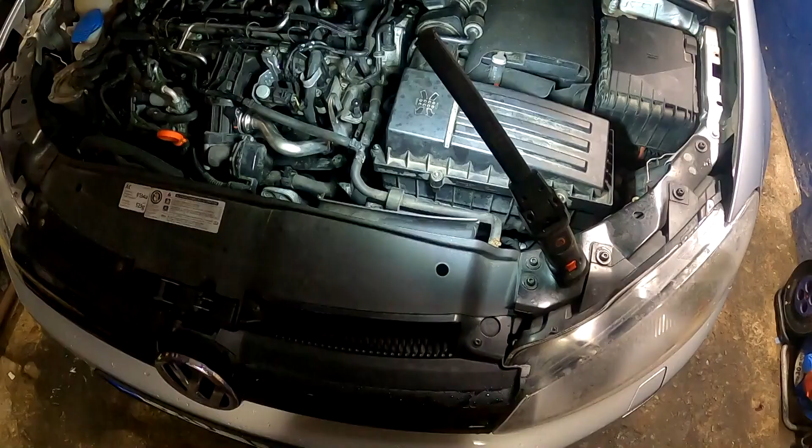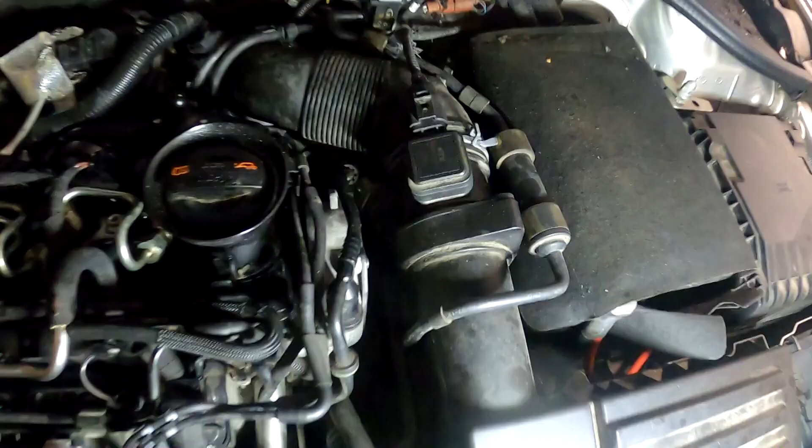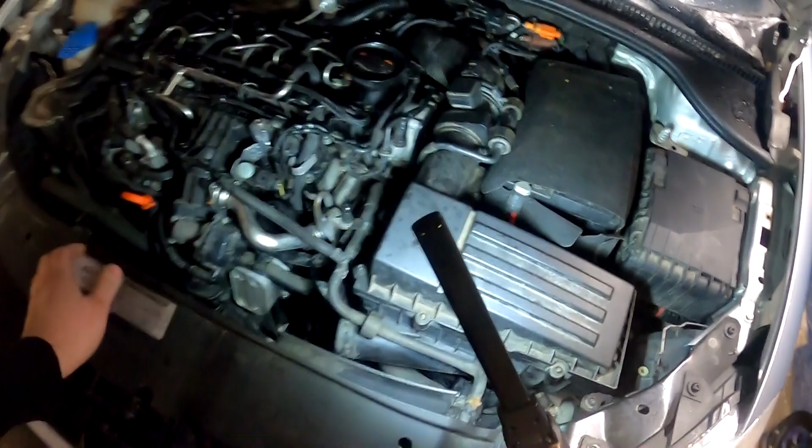So today, Volkswagen Golf 1.6 TDI mass airflow sensor problem. It has trouble codes, engine light illuminated, glow plug light flashing and so on. As you did see, there are two trouble codes present. One is for the sensor itself and the second one is for intake leak.

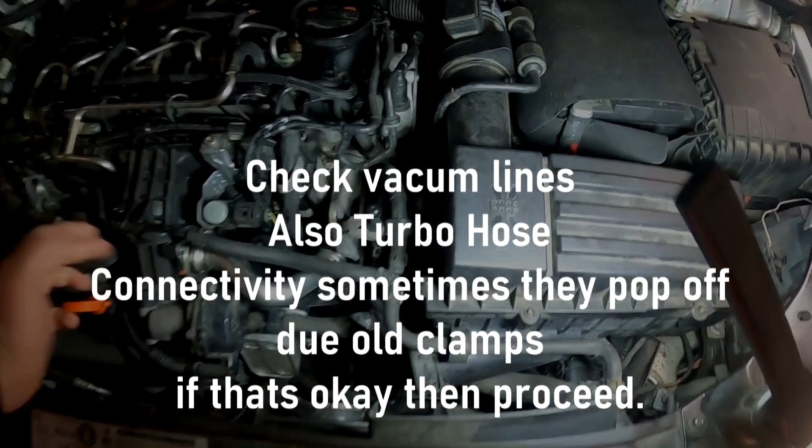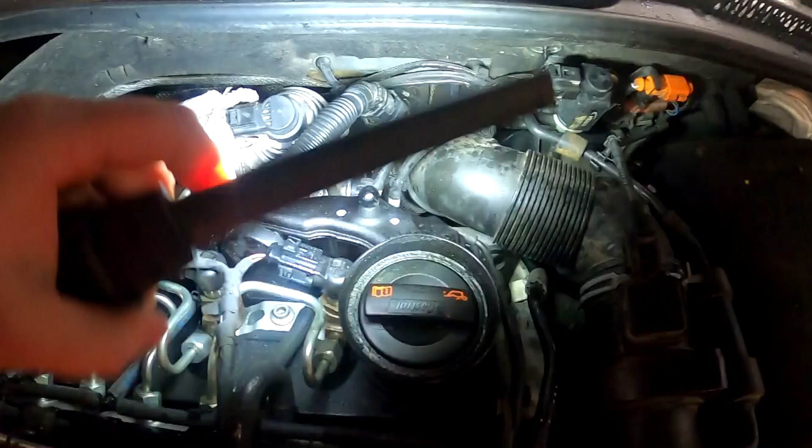In case you have an intake leak, then obviously check all those vacuum lines. As well, make sure that the turbocharger hose is connected and not cracked. In some cases it can be popped off and then it's making problems. For this particular car there is no problem with the hose, the vacuum line, everything. I did re-check, they are okay.

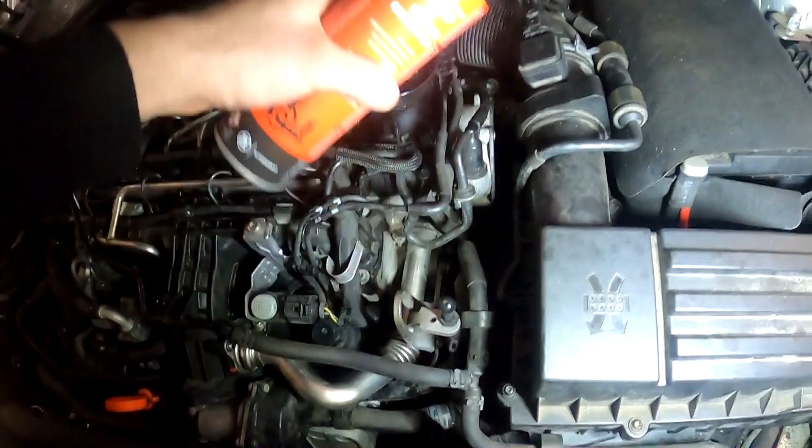Other thing you can do, take the brake cleaner, check intake leaks, spray it on the hoses, and then if the engine RPM starts rising, then you have air sucking in somewhere. I did this, nothing. Now let's go to the car and show you what the scan tool can show us.

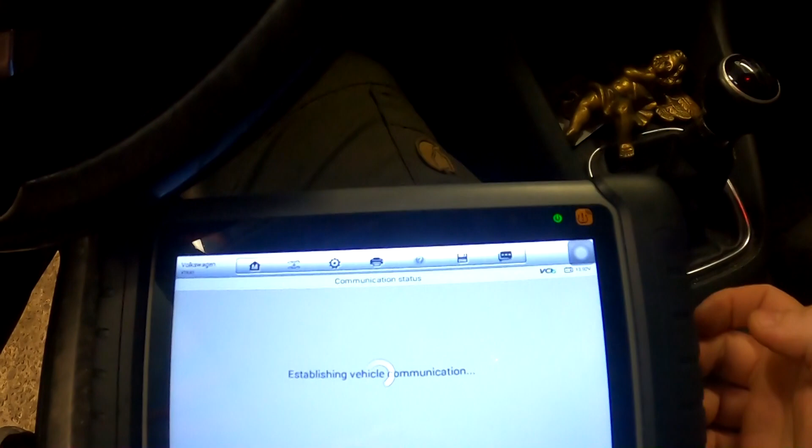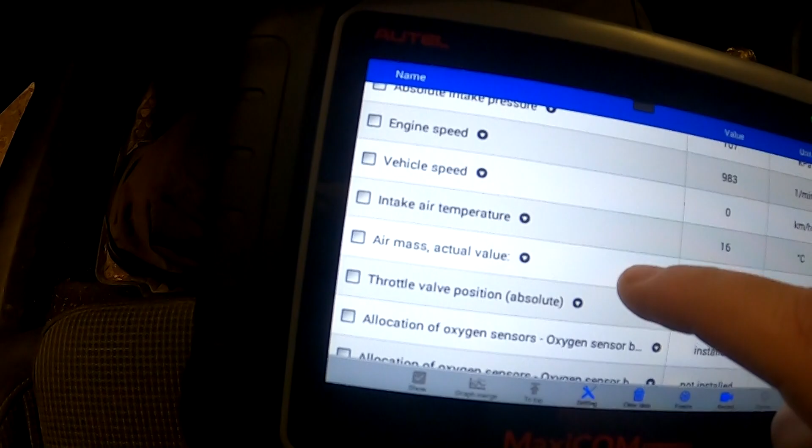Now, while inside the car, as you can see, the glow plug light is flashing, engine light illuminated. Car has no power when we're trying to accelerate. So let's take the engine control module and see what this smart machine can show us. So I have engine control management opened. Take the live data and let's see MAF actual value.

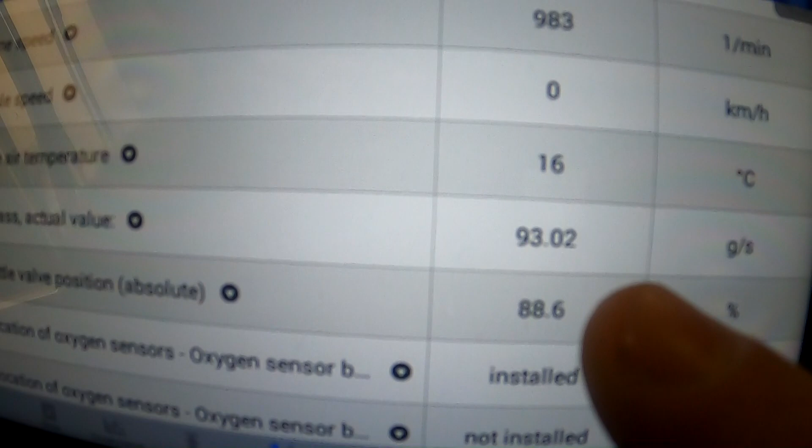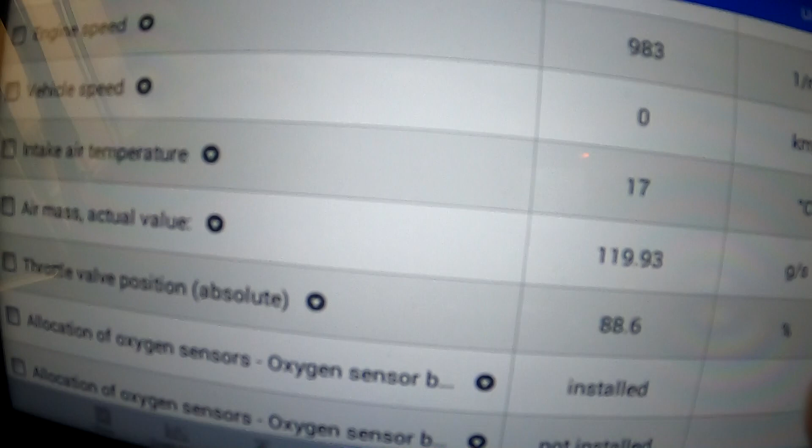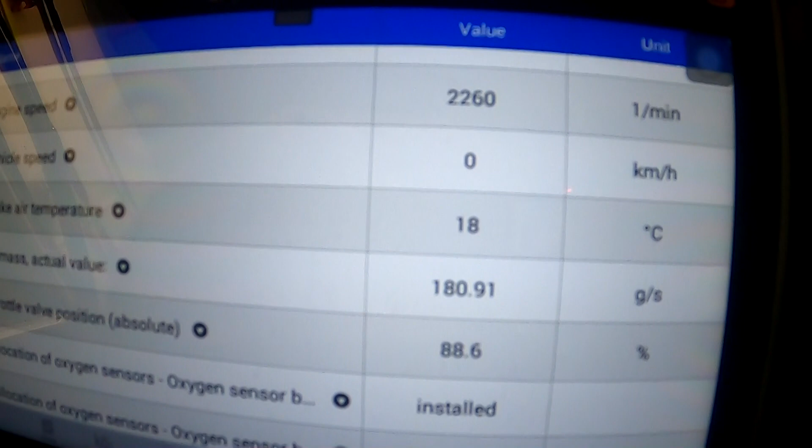Right now the car is at idle and in a perfect world it should be between 2 and 9 grams. Right now it's going crazy. And if you raise the RPMs to 2.3, 2.5k, then between 15 and 30 grams should be the ideal specification. Right now, if I'm raising the RPMs, this thing is going crazy, 180 grams. So definitely we have a problem with this one.

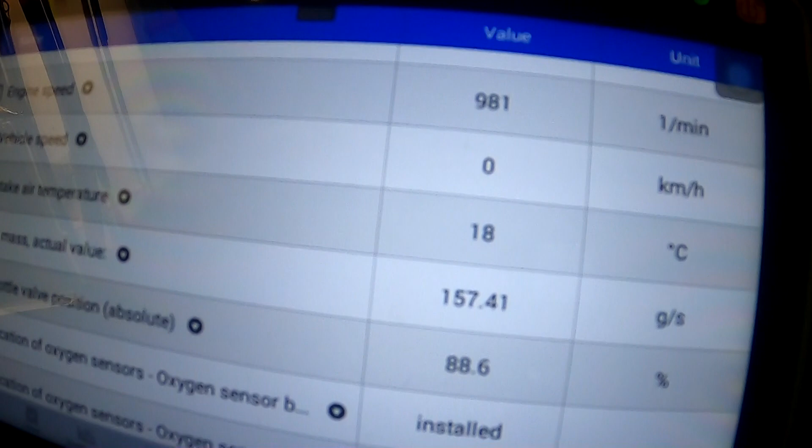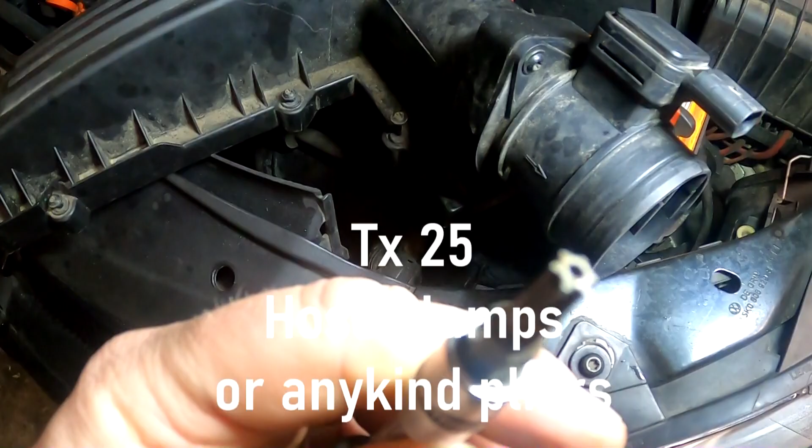And if you're doing this, make sure the engine is warm. Do not do it with a cold engine. So now I have the brand new mass airflow sensor and I'm going to replace it and let's see the results after that. Changing the mass sensor, pretty much you take this airbox off, Torx 25. Take this hose clamp, move it aside, take this vacuum hose, and now there are 2 bolts which you have to take out.

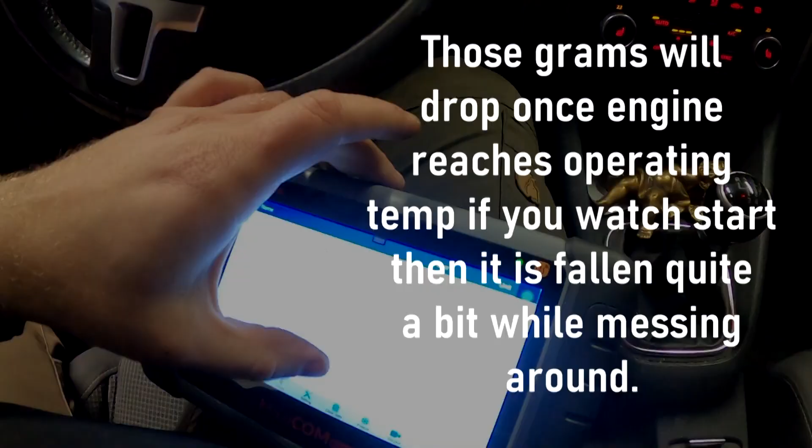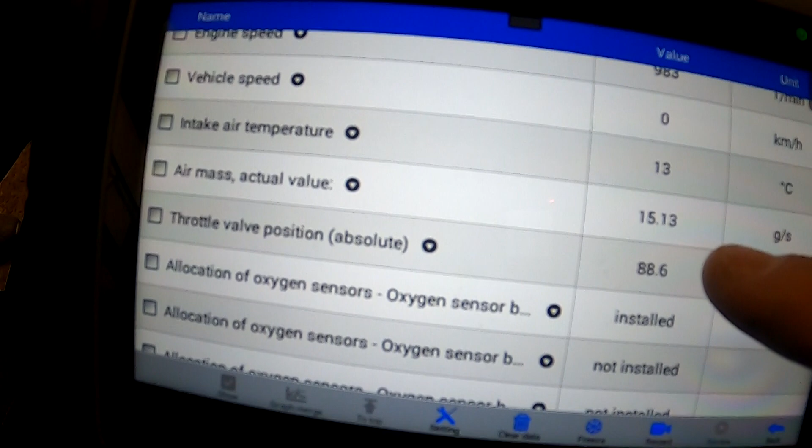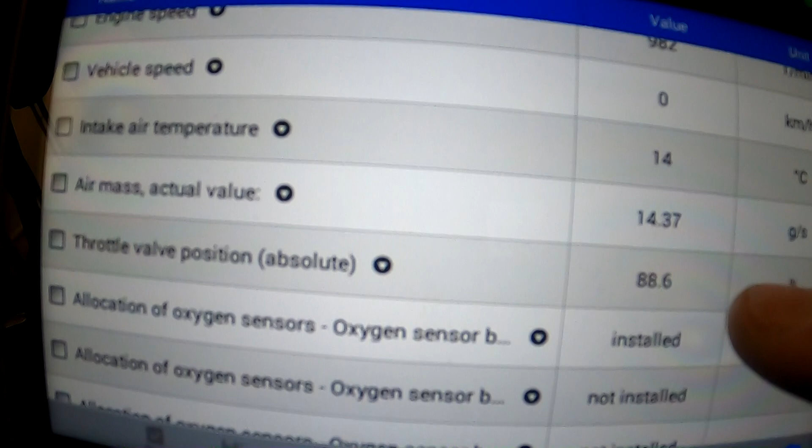Okay, now after deleting the trouble codes and changing the mass airflow sensor, the engine light and the spiral light are gone. So let's go to live data and see what grams we get now. Now we have much smaller numbers here. 14 grams and dropping, no crazy numbers. I'm not sure what's the specific number for this particular Volkswagen Golf. It may be a little bit higher, because of different brands and makes. Maybe that 2 to 9 won't apply here, who knows.

Now nothing else, time to take the test drive, make sure that everything runs perfectly, and if everything is okay, then this video will be uploaded.